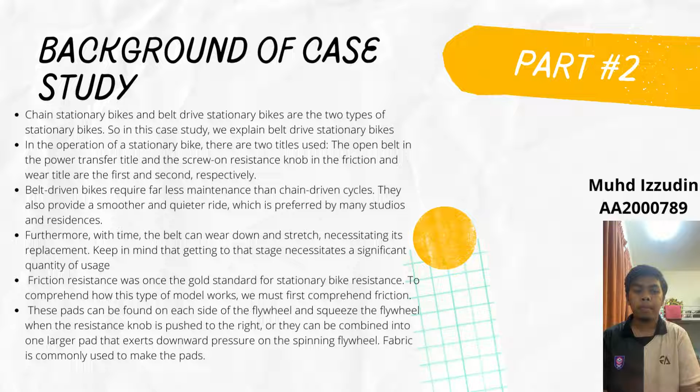Friction resistance was once the gold standard for stationary bike resistance. To comprehend how this type of model works, we must first comprehend friction. This pad can be found on each side of the flywheel and squeezes the flywheel when the resistance knob is pushed to the right, or they can be combined into one larger pad that exerts downward pressure on the spinning flywheel. Fabric is commonly used to make the pads. That's all.

Okay, now I will talk about basic theory or literature review. First, velocity ratio, N2 over N1. That means driven velocity over driver velocity, equal to W. W for angular velocity. W2 over W1 equal to N. N for speed or RPM. N2 over N1 equal to D1 over D2. D means diameter of the pulley, equal to D1 plus t, and D2 plus t. To get N2 over N1, W equals 2 pi N, and this formula for W equals V over R equals 2V over D.

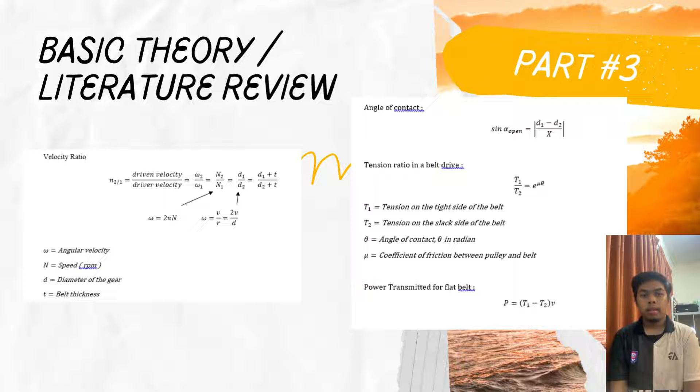For angle of contact, sin alpha equals D1 minus D2 over X, and the tension ratio in a belt drive, T1, the tension on the tight side of the belt, over T2, the tension on the slack side of the belt, equals e to the power of coefficient mu times theta. For power transmitted by a flat belt, P equals T1 minus T2 multiplied by V. That's all.

Okay, next, basic theory and literature review for the screw on the resistance knob in the title friction and wear. First, limiting angle. Tan limiting angle equal to coefficient of friction. Tan screw angle equal to P, for pitch, over pi d, diameter. Force P equals W multiplied by tan screw angle cos beta plus tan alpha over cos beta minus tan screw angle and tan limiting angle. P for force, W for weight.

The next part is the part of analysis and calculation. So based on our case, which is about the stationary bike, the chapters involved for this stationary bike are first the power transfer, and the second one is friction and wear.

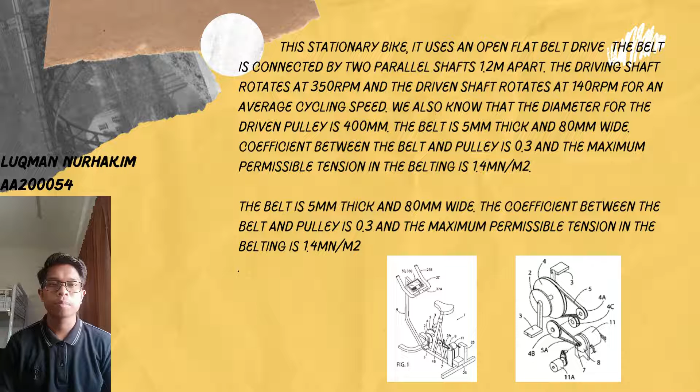So based on the given information, we can calculate the needed questions, which are number 1, the diameter of the driving pulley, number 2, the maximum power that may be transmitted by the belting, and number 3, the initial belt tension. So for question 1, the diameter of the driving pulley, we know that using the ratio N2 over N1 equals D1 over D2, we can simply get D1, which is N2 times D2 over N1. So we get 0.16 meter.

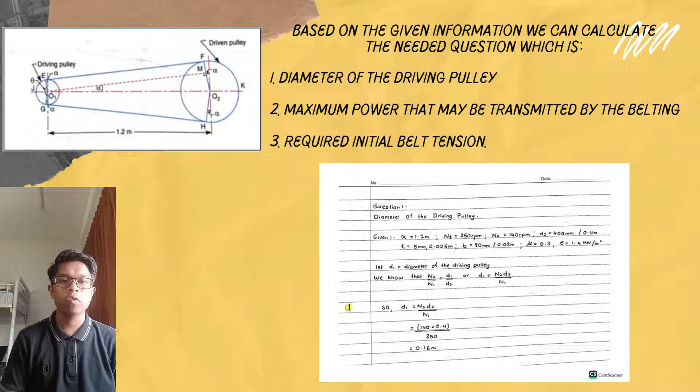So for question 2, we need to find the maximum power that may be transmitted by the belting. So we basically use the formula P equals T1 minus T2 times V. V is the velocity. So first we need to find T1 and T2. T1 we assume is the tight side tension of the belt, and T2 is the slack side tension of the belt.

So T1 we can get by using the formula permissible tension times B times T, we get 560 Newton, and T2 using the formula T1 over e to the coefficient of friction times theta that we get above, which is 168.52, so we get 2.42. So T2 equals 231.4 Newton. For the velocity of the belt, we use the formula pi D1 times N1 over 60, we get 2.93 meter per second. So lastly, we get the power that may be transmitted, which is P equals T1 minus T2 times V, which is 963 watt.

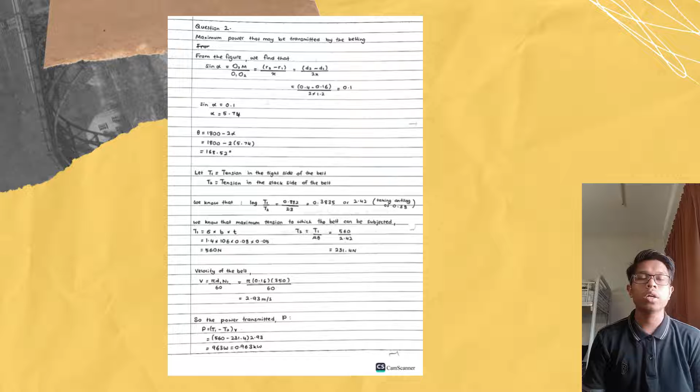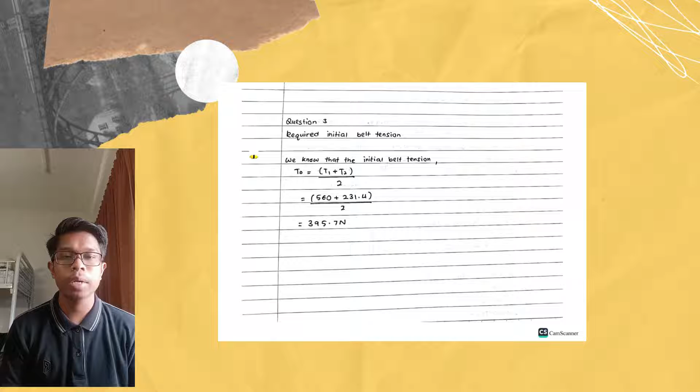So for question 3, we need to find the required initial belt tension. So we know that the initial belt tension uses the formula T equals T1 plus T2 over 2. T1 we got before is 560 and T2 is 231.4 Newton, over 2. So the initial belt tension is 395.7 Newton.

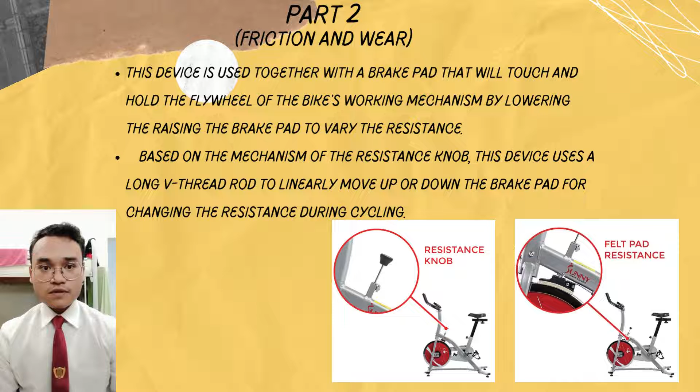So next, based on the mechanism of the resistance knob, this device actually uses a long V thread rod to linearly move the brake pad up or down for changing the level of resistance. So this is the picture of the resistance knob. Given the V thread angle, beta, is equal to 10 degrees, a threaded screw has a mean diameter of 6 mm and the pitch is 3 mm. Given that the coefficient of friction between the nut and the screw is 0.25, and we assume that the load rotates with the thread.

So based on this data, we can determine the torque required to lower a load of 5 kN, or in other words, by twisting in the clockwise direction, so that we can lower the resistance knob along with the brake pad itself. Based on this data, you can also find the percentage efficiency. So for the calculation, first we need to find the limiting angle, alpha, based on the formula tan alpha equals mu, the coefficient of friction, which is given. So we can find the limiting angle, which is equal to 14.04 degrees.

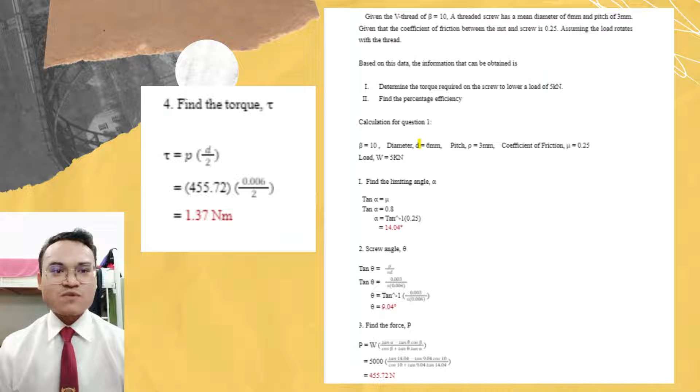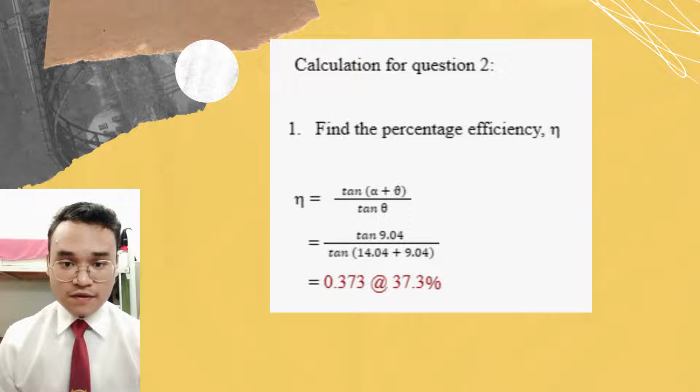And for the next question, we need to find the percentage of efficiency. So by using the formula, remember for this scenario, the scenario is about to lower a load. So therefore the formula that needs to be used is eta equal to tan alpha plus theta divided by tan theta. So using all of the information that we have, the percentage of efficiency is equal to 0.373, or 37.3% of efficiency.

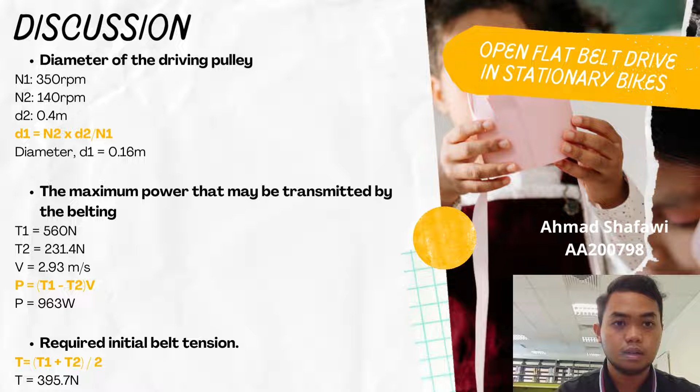So we can compute the power transfer when we have all of the above data, which is 963 watt, or 0.963 kilowatt. And the final problem of the stationary bike belting is determining the required initial belt tension. So for this question, we can directly utilize the provided formula to determine the value, which is 395.7 Newton for this situation. And that is the end of the first part of the question.

So for the next part, the problem for this project is the resistance knob in the stationary bike. So the information given is a threaded screw with a V thread of beta equals 10, a mean diameter of 6 millimeter and a pitch of 3 millimeter. Also given is a coefficient of friction of 0.25 between the nut and screw, assuming the load rotates together with the thread.

So the first question is to determine the torque required on the screw to raise the load, which is 5 kilonewton. So the first step is to calculate the limiting angle and the screw angle, which we got as 14.04 degree and 9.04 degree respectively. And then we use the static formula to determine the force P, and we get 455.72 Newton. And finally, using all the data we calculated before, we estimate the torque, which we got as 1.37 Newton meter. And that's how we solve the problem.

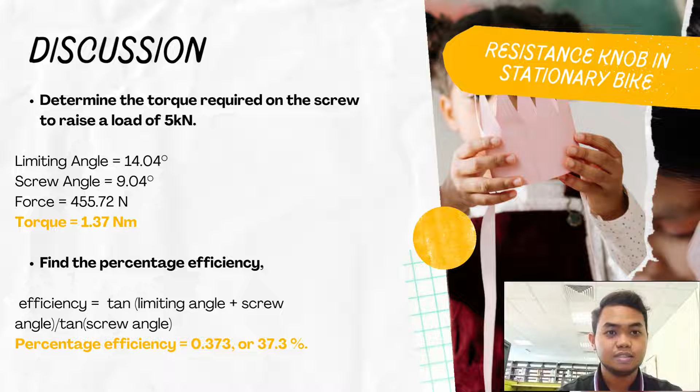After finishing this report, we have recognized two ideas that we have learned, namely power transfer and friction and wear, that are applied in a workout device today, namely the stationary cycle. Finally, we ran some calculations to see how these two notions interact to create modern exercise equipment that allows individuals to exercise without exerting too much effort simply by being indoors. As a result, it can save money, time, and reduce accident risk.